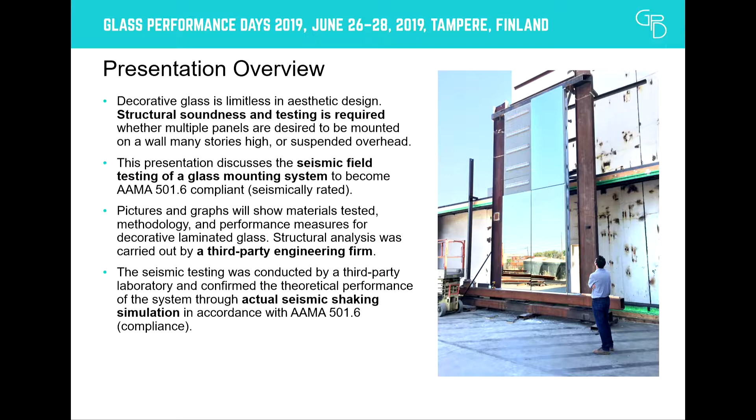My presentation overview is about earthquakes and seismic events and how they affect buildings. In fact, not how they affect buildings, but how we then took glass cladding that is usually installed within buildings and tried to make a mounting system that was more friendly to withstanding the shaking back and forth of earthquakes.

So when you are mounting glass in a building, whether it's way up high on a wall, whether it's overhead, whether it's a facade, whether it's right behind a reception desk or whatever, we want to make sure these things are sound physically and go through testing.

This presentation will discuss our system that we then took to seismic testing to see if it would be compliant with AAMA, American Architectural Manufacturers Association standard test, which is 501.6 in the US, which tests a system for its ability to withstand shaking back and forth. We'll show some pictures and graphs. The third-party testing was done by Intertek out in Fresno, California.

So, seismic events: in the US alone, 4.3 million businesses are impacted by seismic events. The amounts of costs involved are huge - if I remember correctly, $2 billion per year. This is, again, in the US alone, of effects of seismic events on buildings.

The earthquakes are very unlikely to happen, so it's called a low likelihood event, but there's a high risk - if it does happen, there's a high cost involved within the buildings.

Again, last night I was talking about just the Earth doing this. It has been shown that as little as 0.02 Gs of force, which is 2% of gravity, can cause you to fall over if it's coming at you sideways. So that's just what a little bit of shaking does. Some of these earthquakes get as high as 3 Gs of force, 3 times gravitational movement back and forth. Typically, the real strong ones are just over 1.

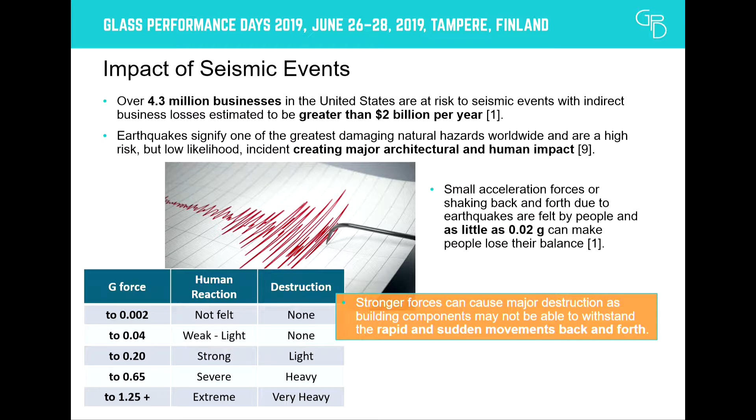But this chart kind of shows the severity and what it does - the weak ones, the light ones of very low G-force, there's really no destruction, although things get wobbly and fall, but there's usually no damage, all the way up to the ones that are above 1.25 G-force, of the force of gravity, being very heavy damage and extreme conditions. So stronger forces can cause things to fall off walls.

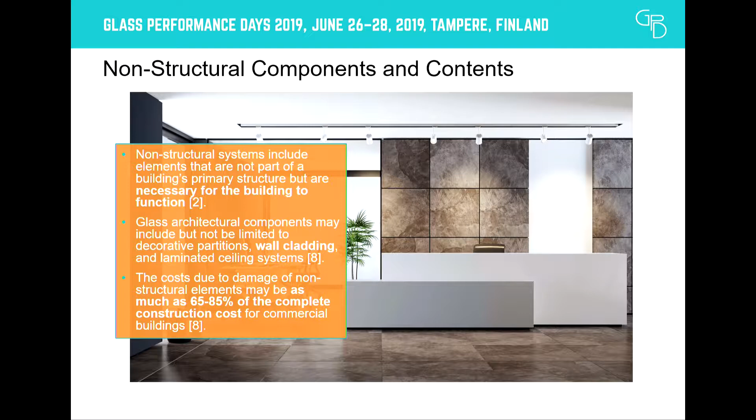The non-structural parts of the building, although they're part of the building, they're not the main structure, they're attached to the main structure. They can cause 65 to 85% of the cost of the building in damage, even though they're not part of the structure. They're attached to the moving parts.

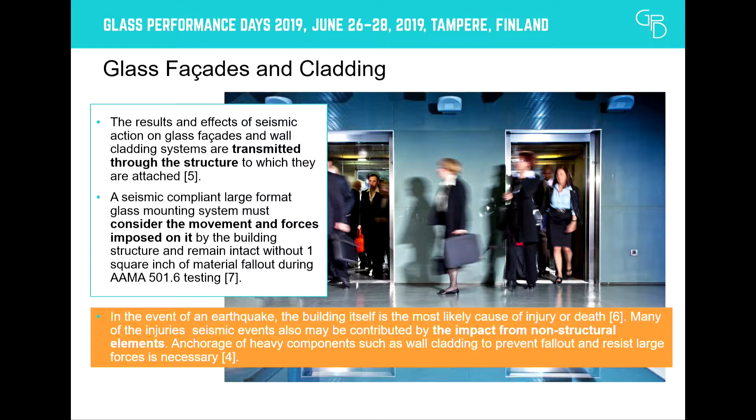So the main thing is that the parts of the building that aren't the building itself, the non-structural parts, are the most likely cause of injury or death. We were tasked with figuring out a way to make our glass and the way it's mounted to walls less dangerous in case of earthquakes. We had been putting glass in all over the US and other parts of the world, and typically being asked to mount it now, more recently than before, and what kind of mounting system we have.

As we got into the mounting portion of working with our glass, we started getting asked, well, how does that hold up seismically? Although facades and other building materials had been tested a lot for seismic capabilities, there hadn't been much testing for wall cladding systems, for just decorative glass. A lot of people hear decorative glass and just think, oh, it's that pretty stuff. It doesn't have any structural necessity. It doesn't have any safety.

Adam led me into a discussion earlier this week where I told him we did decorative glass, and we started talking about safety standards. He asked why I was talking about that since it's just decorative. Most people, when they talk about decorative, are just talking about pretty stuff. I thought about that, and realized we've been making safety glass, tempered glass, laminated glass to meet all the standards. So I appreciate that feedback, that decorative can also be safe, and it can also be seismically safe.

People on the West Coast in California had been really active in wanting to have seismically sound materials as well as mounting systems to put in. We just completed a job out in California in San Francisco where the system had to be completely seismically rated. But we're also being asked in New York now and other areas to also have some seismic capability. Different buildings have different ratings based upon the severity of earthquake potential in that area, the height of the building, the type of building. So there's all these different things that have to be taken into account.

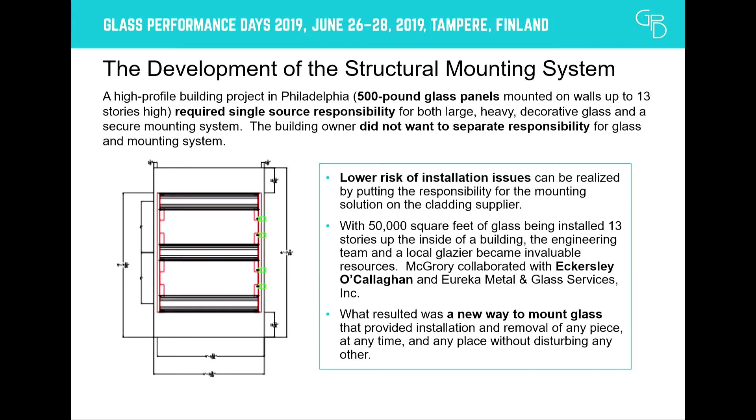So how did we develop this? We had been installing up to 500-pound pieces of glass on walls with mounting systems where you wouldn't see physical parts of the mounting system come through the glass. So the glass would just have a small reveal and you'd have glass. We were using different types of hanging systems, but there were ones that we developed.

We worked with third-party engineering services to do finite element analysis. We worked with Eckersley O'Callaghan to determine whether this would structurally be able to hold glass on the wall. We also worked with installers such as Eureka Glass and Metal, out of Pennsylvania, on these systems. So we had new ways of mounting glass that we also had to test seismically, to see will these things meet the seismic forces necessary to keep them on the wall without damage.

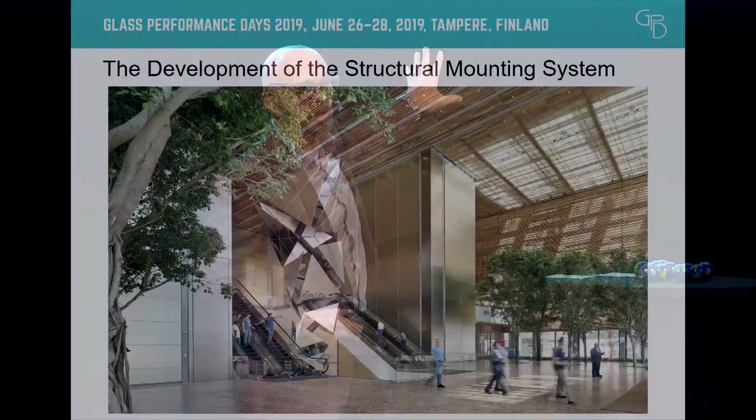This is one of our installations, in Philadelphia. It's about 13 stories high, with glass panels ranging from 200 to 500 pounds, thick laminated panels. Any panel in any place at any time can be removed without having to move or touch another panel. This was part of what we wanted to do, make it easy to access a panel and remove it from the wall. We were then asked, in this situation when doing multiple panels, can it be seismically sound, seismically compliant to AAMA 501.6, which is the seismic test.

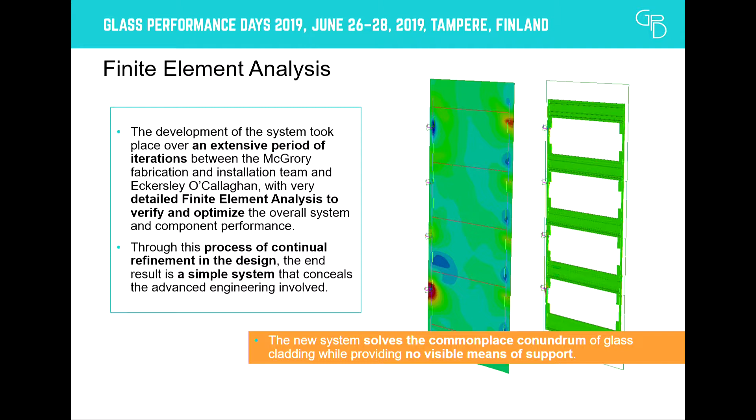So we took that and we went one step further. Eckersley O'Callaghan ran a finite elements analysis on the system with the different sizes we were planning to put in. They looked at drift in the X direction, looking at X, Y, and Z components singularly and additively, to analyze the stress on the system, the stress on the lami, and the stress on the structural system that adhered it to the rear materials, which are extruded aluminum.

And we kept going back and forth with, if we do this, then what? They would test it and come back with, yes it works, it doesn't work, maybe you want to try this.

The resulting system became a plug-and-play system where we were able to use a standardized extrusion with preset cutouts, similar to storefront systems where things just fit and snap together. So we created a system that was almost snap plug-and-play, went on the back of the glass, went on the wall, and kept things within plus or minus 0.005 inches to make sure everything fit tightly, because you didn't want to mount glass all over your wall and have them not line up.

And we wanted to make sure that when it was mounted on a wall and the glass would move back and forth, it was precisely aligned so it would slip past each other and not bump into each other in case of movement.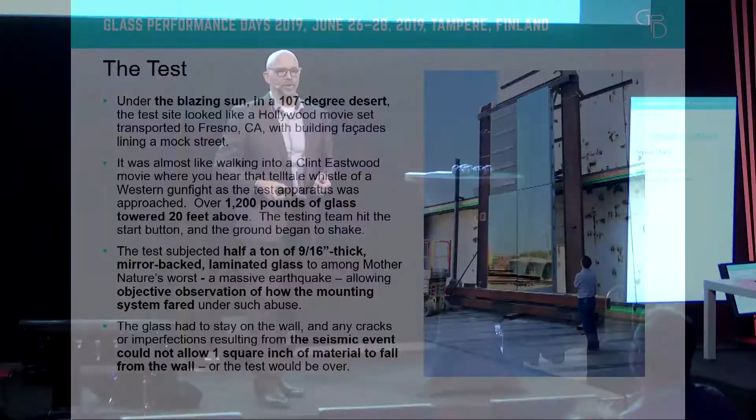So the test was done in July of last year in Fresno, 107 degrees out. If anyone's been to the Intertek facility in Fresno, you see a line of buildings, facades there where people are testing all sorts of material. We're doing interior glass out in 107 degrees, which is about 42, 43 degrees Celsius. We're testing it for its seismic capability.

This 9/16 inch glass is 4 feet by 10 feet, so the whole thing is 8 feet by 20 feet in the air, 4 pieces when it's finished, each piece weighing about 300 pounds.

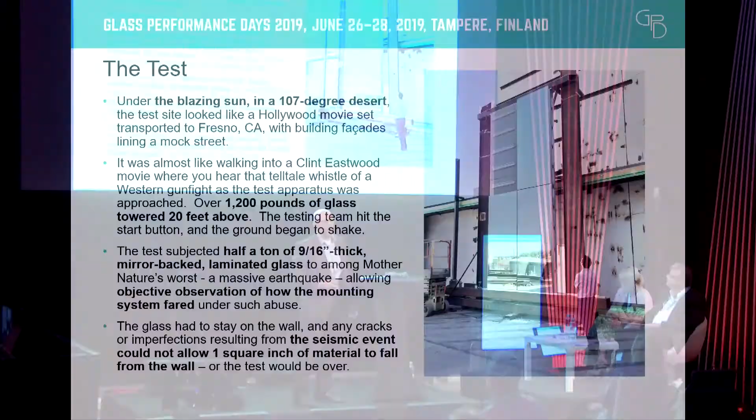It was going to rack back and forth through a simulation where we start with tiny little bits of movement at the base, back and forth a half inch or so, and then it moves further and further back and forth at a relatively fast pace. Then it gets up to about 6 inches of movement and slows down, where the bottom is going 6 inches this way, then 6 inches the other way.

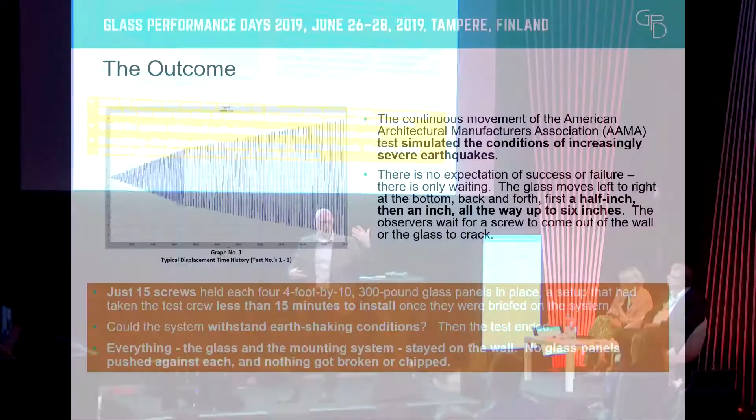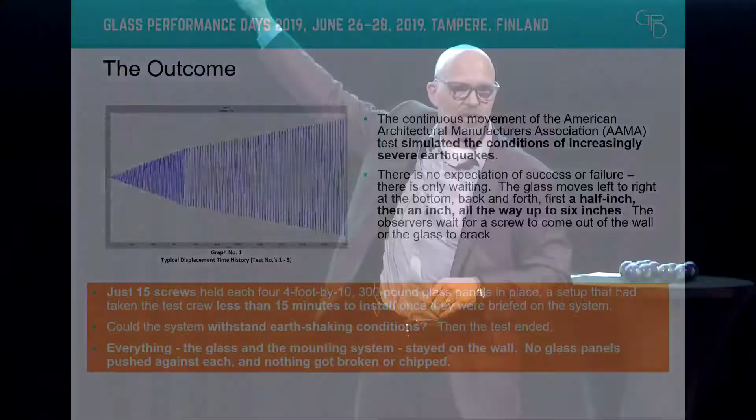The whole thing's moving. Each piece of glass had 15 screws just holding it on the wall, and everything had to move back and forth. The AAMA test requires going through this series of movements for about 6 minutes, and you can't have more than 1 square inch of material fall off the wall. That means glass, that means metal, that means anything we mounted.

So the whole system - a wall was built, sheetrock was put up, our wall mounting system was put on top of it, and then the glass was put on top of that. If any glass broke off, or any piece of that system broke off, and it was more than 1 square inch - that doesn't mean a half square inch plus a half square inch plus a half square inch, that wouldn't have passed. So as long as nothing falls off, or less than 1 square inch falls off, the test keeps going. At 1 square inch, the test stops.

This is footage that will bring us into what the test was. You'll see the movement. Can you start that?

This is part of the installation.

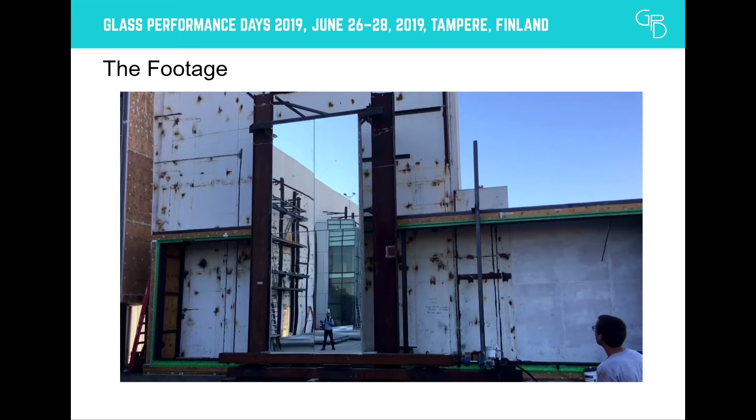This is when it's doing about 12 total inches of movement, plus and minus 6 at the base. And the glass is sliding past each other, not running into each other.

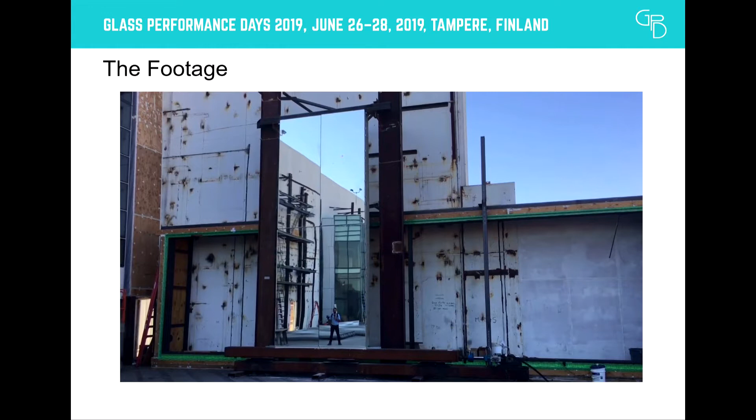We heard that bang and we thought, what happened? And it was the end of the test. So we didn't know what to expect. You go to these tests and you just don't know, is it gonna work, is it not gonna work? The analysis that was done, the answers came back like, yes, it should work. But while you're going through the test, you're at your wit's end, nervous, what's going to happen?

At that point, the test was over, and that was it. It was like 6 minutes of moving the glass, and then that's the end of the test. So you take months of prep, and in 6 minutes, the test is over.

At that point, we were rated as nothing fell off, everything stayed on the wall, so we became AAMA 501.6 compliant with the system. For us, it was an accomplishment, because we went from being what I would consider a decorative glass company to now an architectural and decorative glass company providing mounting systems. A lot of architects were saying to us, we want one source responsibility for glass, for mounting, the mounting system, the process of doing it. So you're not saying, I'm only responsible for the glass, the glazer is responsible for the install, and if it doesn't work out, they point at you that it's your fault. So we've been asked a lot to provide the whole system, and this allows us now to provide wall mounting systems for glass with our glass that are seismically rated.

And that was an accomplishment. We're happy about it. And I think that leads us to questions.